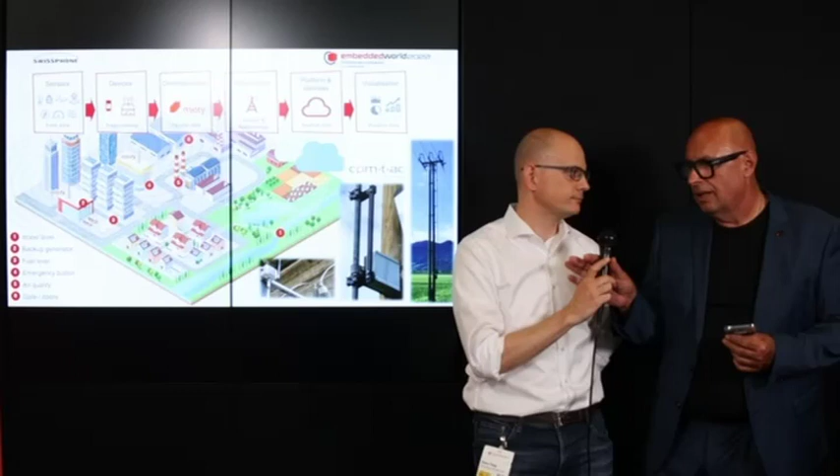Very well. So, what was the intention of Swissphone joining the mioty alliance and also incorporating the mioty standard into your products?

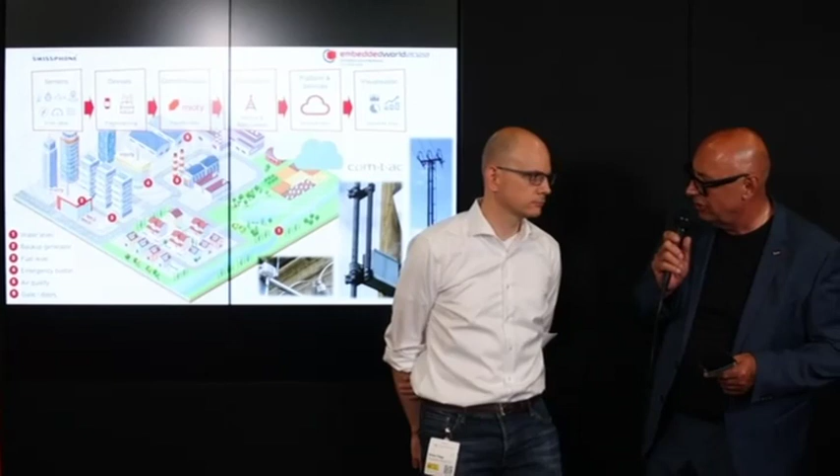Yes, so as we are engineering guys, we have been thinking about LPWAN systems and how they can be integrated into our existing radio products. And as it turns out, mioty is one of the best technologies that fits currently together with our existing radio technology within our pagers, but also for other use cases. As you already know, it's about the key USPs of mioty that brought us to this decision - it's about reliability, robustness, mobility, and also the scalability.

Well, the hard key of your business is of course reliability, because you provide networks also to police and firefighters and so on. But that's not it - as you already said, process industry and so on. HSE is a big issue there, and reliability is actually a must. So how do you position yourself in the IoT process chain?

Okay, yeah, that's right. So we see ourselves bringing mioty into our own segments, and by doing this, we try to be a full chain provider - from the very beginning at the endpoint up to the system that the user actually needs and uses, like control centers and so on. In between, we try to bring our own existing products within this chain. On the other hand, we want to help the other alliance members and their segments with our products, so that the family can grow together.

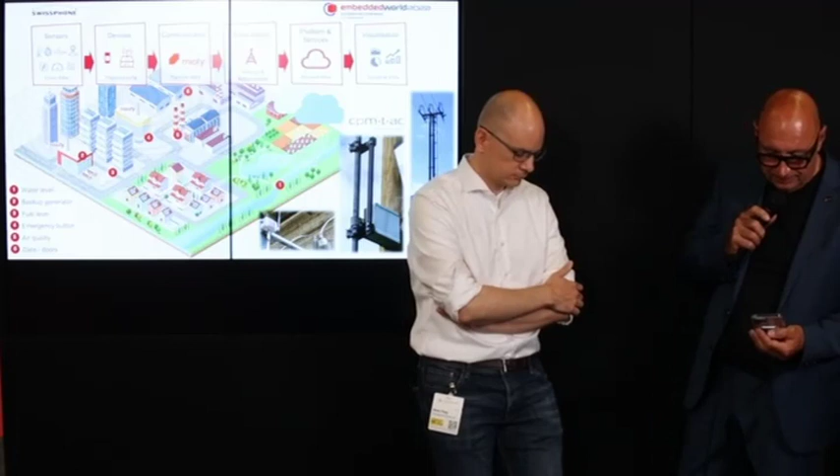Thank you very much, that's very interesting. But what kind of products are these in particular you have to offer?

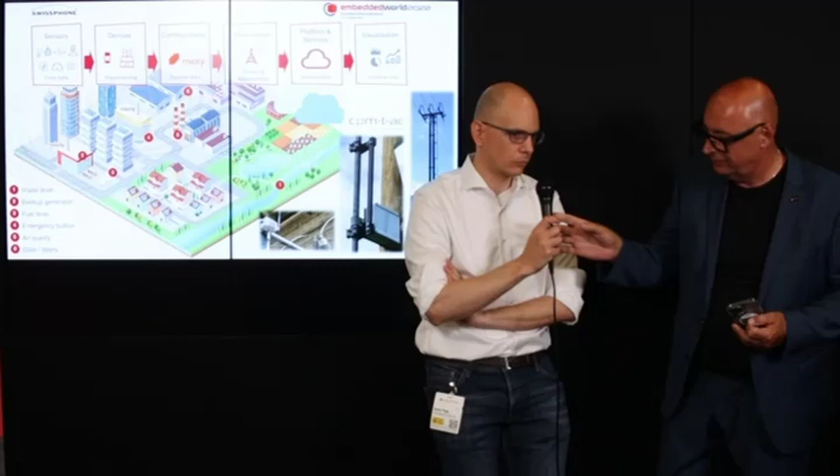So we are currently working on three different products. One of it is a mioty base station that we will launch at the end of the year, and then we have a mioty module that we already brought into some prototype projects with partners of the alliance. And last, we of course want to integrate the technology in our existing paging solutions, so we will see pager terminals not only have LTE but also mioty integrated inside.

The main use case for this is lone worker protection. So in industrial environments, this is a big issue - to keep track on your personnel, know where they are, and give them something into the hand if something happens. This is what our products already do, and now we want to combine this with mioty.

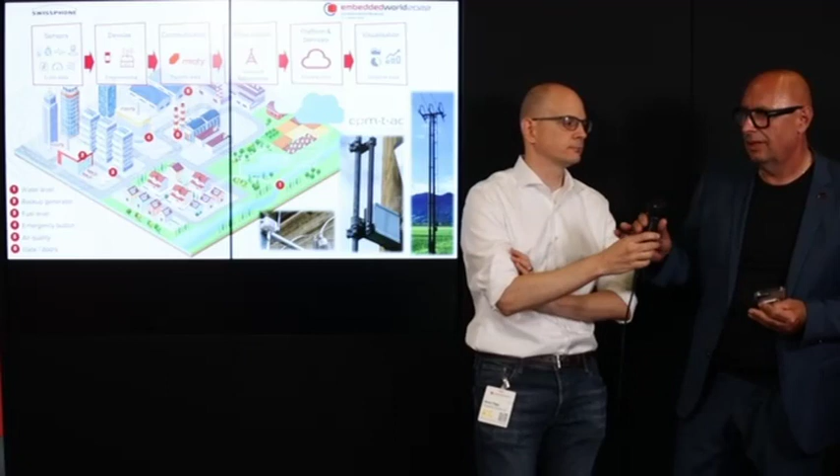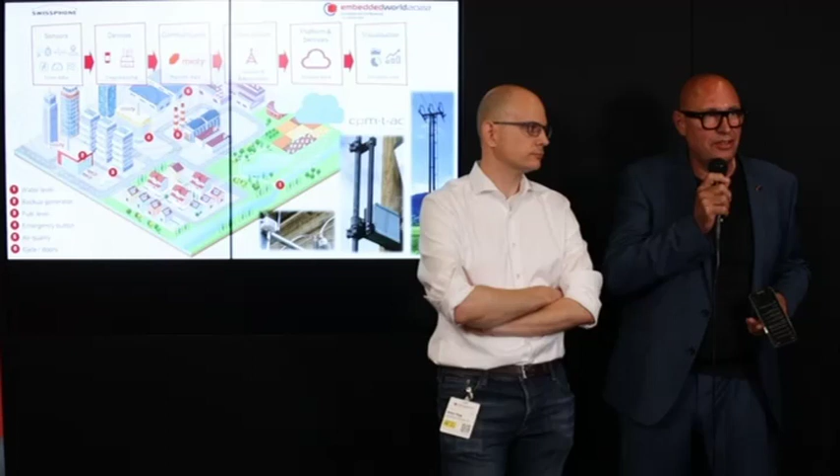Well, we hear a lot of rumors from the communities saying mioty is a fiction. Of course, mioty is not a fiction, it's reality with real products, a real ecosystem, and the real reliability which mioty has to offer with the standards. You didn't come with empty hands like all your pre-interviewers, also from Switzerland. So what have you brought with you?

Okay, so I don't showcase them all during the interview, but you're welcome to talk with me together with the product and have a closer look. So we have them here on the table.

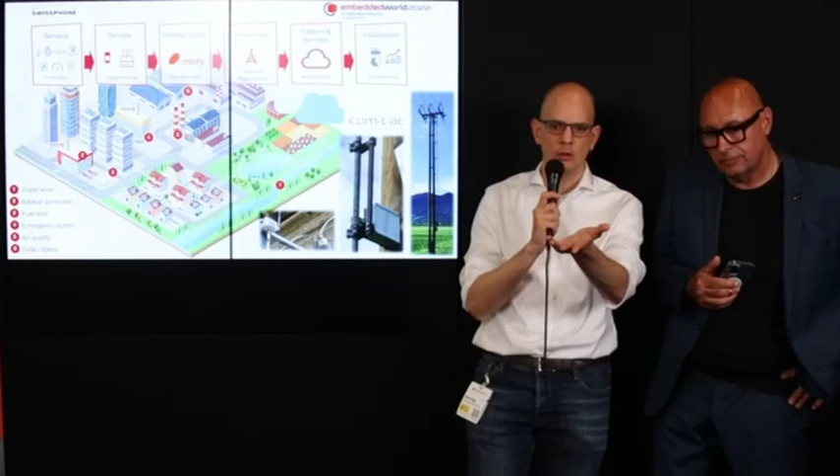What you see here is the mioty base station. It's very compact and rugged. This is the prototype that we have already featured within our evaluation kits, so many companies within the alliance have laid their hands on it and tried it out. It runs the evaluations from Fraunhofer, but the final product will soon have our own software, and will be fully certified.

The strength of the base station is redundancy, besides the compact form. So we have power redundancy - we have DC power inlets, two of them, but also Power over Ethernet, so you can bring your energy together with the connectivity. In addition, we feature LTE as backend connectivity over wireless systems.

Just one word - you said this is one of the first models, looks like a rugged, very well thought product to me, which you can really release in the wildlife, industrial settings. We have one customer together, and they have mounted this outdoor. That product has very good IP protection - if you look at it, very well done.

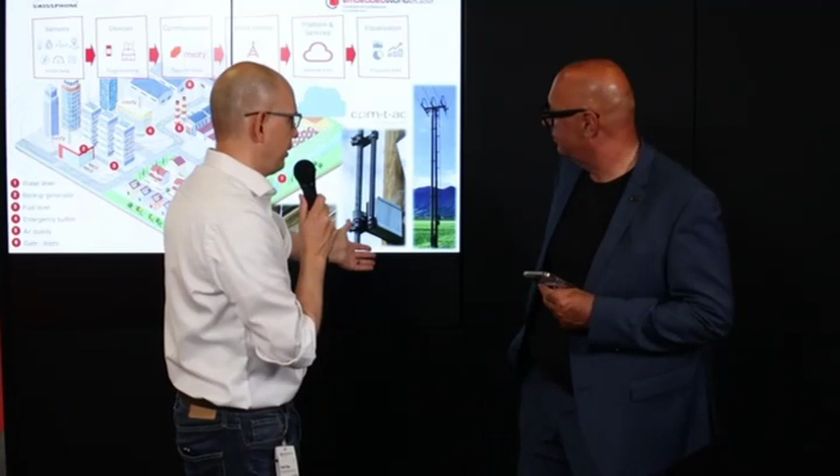So the use case they had was actually pretty funny, because it was an internal competition, like an innovation competition. So employees could bring their ideas, and this one actually won - the one I just explained. So it's about the power grids.

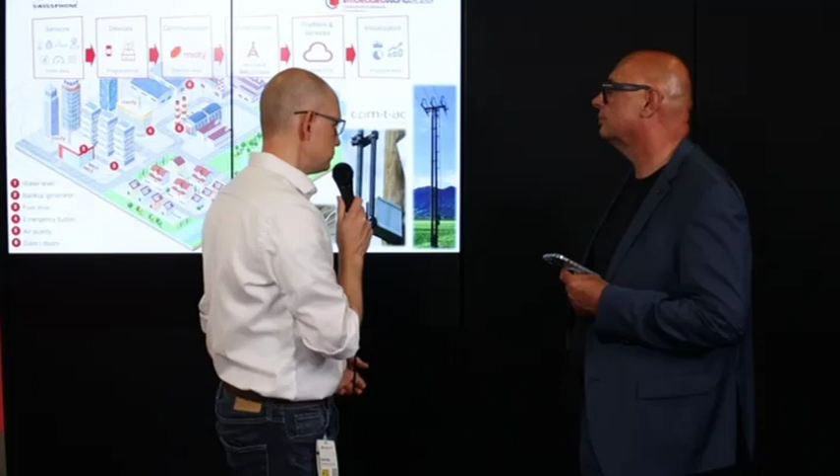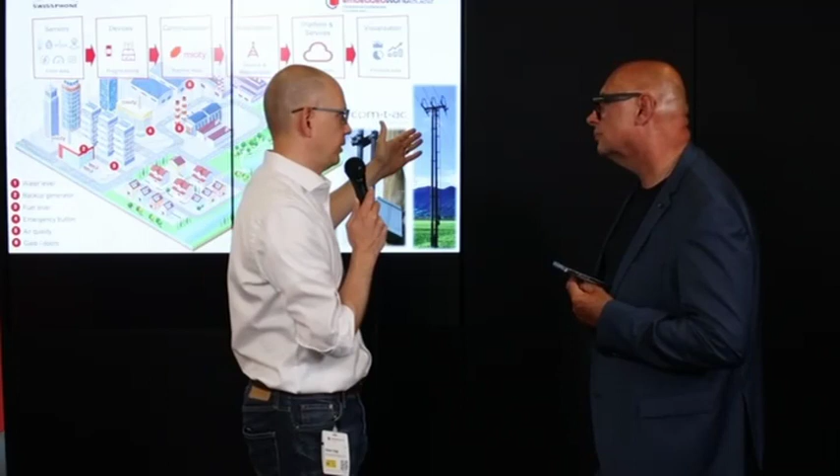Think about mid-voltage power poles you have in rural environments usually - they are very segmented, so you have a lot of interconnections and junctions, and you need switches to switch them off if you have to repair such a network. What they want to have is supervision of this switch state, and this is where Comtac came into play.

Yeah, power is quite a critical and big issue, especially at this time, and quite impressive that you have won this case - it's not easy. There are a lot of sharp, very skilled people applying for such a POC. So congratulations for that, quite impressive.

And what else? What's the next plan for, let's say, the next year for you and the projects and the implementation of this wonderful POC?

Okay, so yes, we can talk a little bit more about this POC, and the good news is that now we know that we will go to the next phase. This is really a project that will bring all of us further, even others within the alliance, because the next question would be the backend and how they could be integrated into their SCADA systems. Maybe a little bit more about this POC.

So we had one base station set up in a rural area, and about 10 sensors - 8 of them were mounted on poles. We had other sensors brought in by Comtac, and we actually helped them to mioty-ize their products. Comtac had LoRa sensors and narrowband IoT, and we helped them integrate our module and optimize power consumption, etc., to get the setup working.

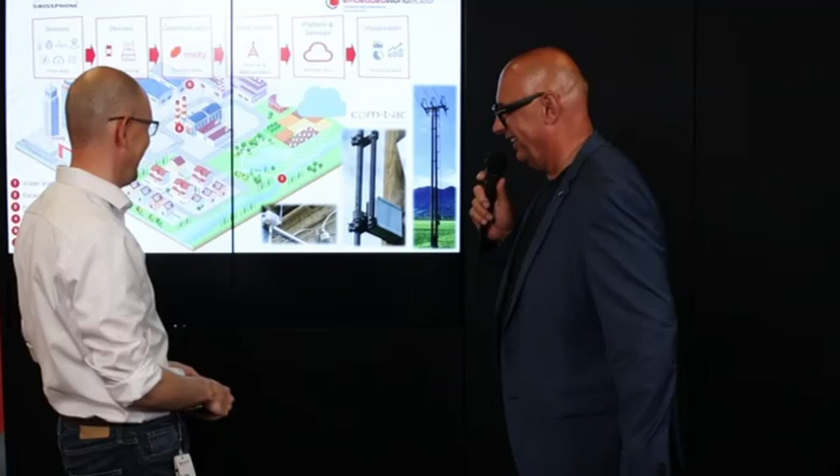Yeah, it's a little bit tricky. Sometimes it doesn't love operators. Okay, one more, we will get this done.

Here we go. Oh, that looks interesting. Tell us more about it.

So let's get back to the POC I mentioned before. I think it's worth sharing some results from there.

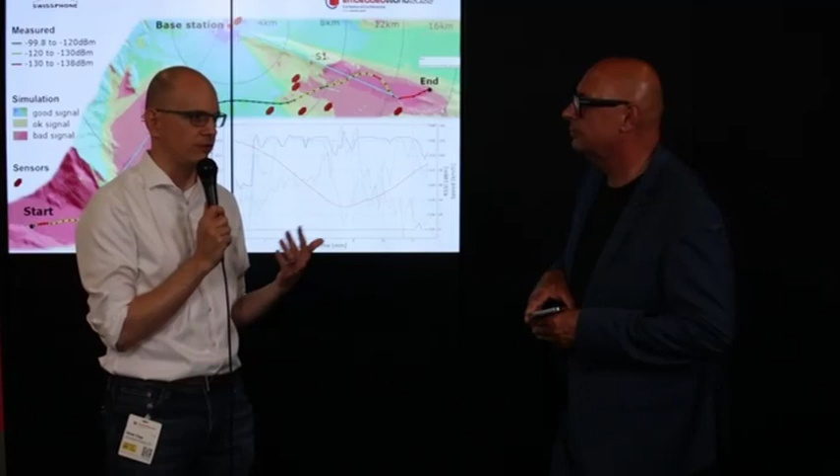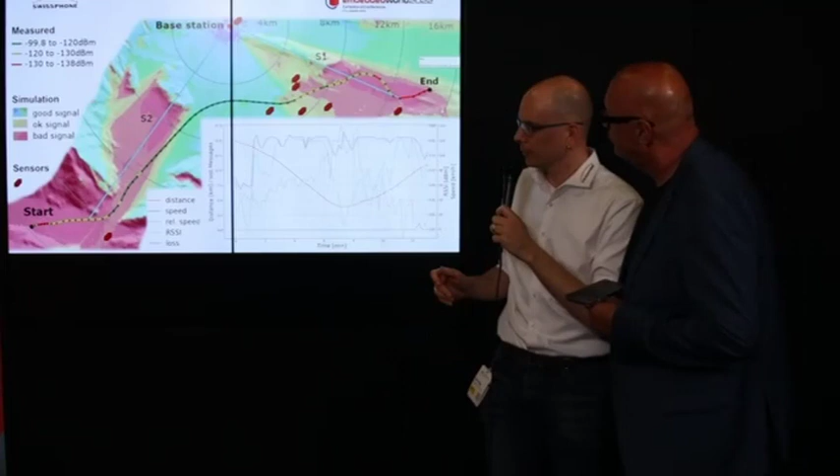Beside the use case I explained with the power grid pole, these sensors are stationary, and this is a map of the area that we had showcased the POC in Switzerland. Here you see the red dots - these are the stationary sensors, and the base station just in the middle. The ranges between the base station and the sensors were up to 20 kilometers in a rural area.

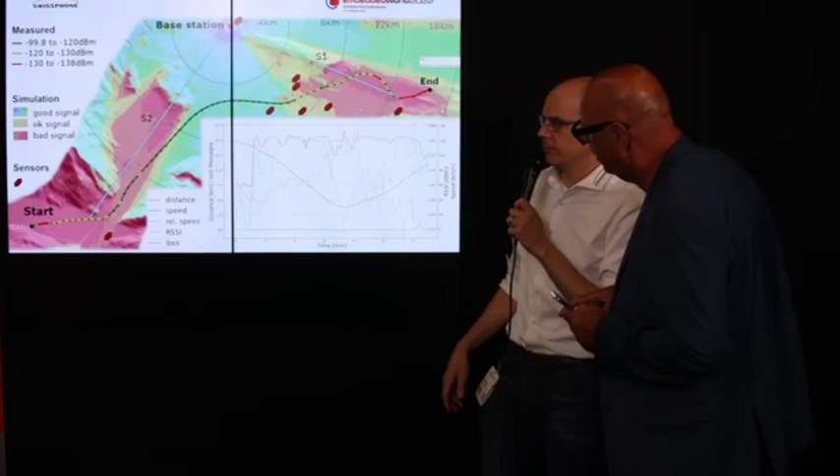We had this POC running over 6 months, and during that time we collected 1.5 million data points and 3 to 30,000 mioty messages per sensor. Most of the sensors were placed at a spot with a link budget just above about 120 dBm, and within that scenario we had not a single lost message during the whole period.

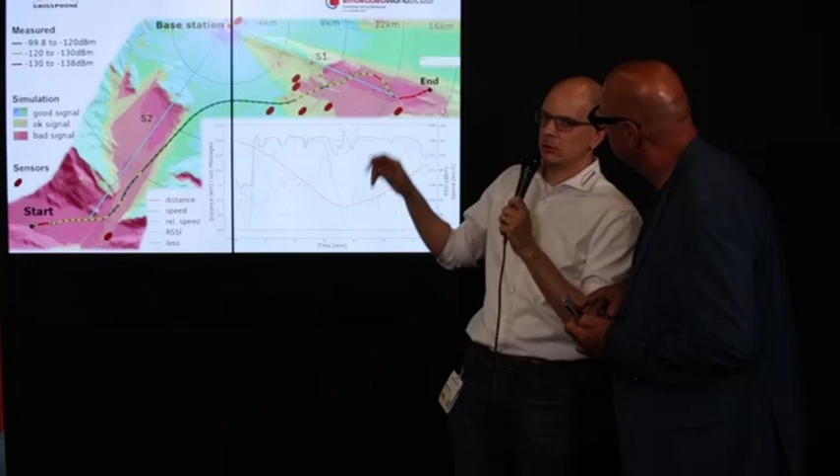We had one spot in the red area where we had about 10% packet loss. What you see in this picture is that Swissphone has pagers, so we rely on mobility and portability - a pager must work also in such an environment, not just static.

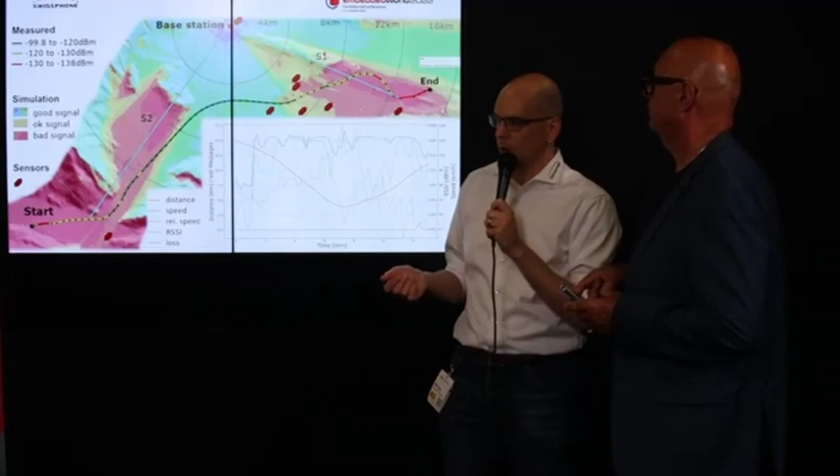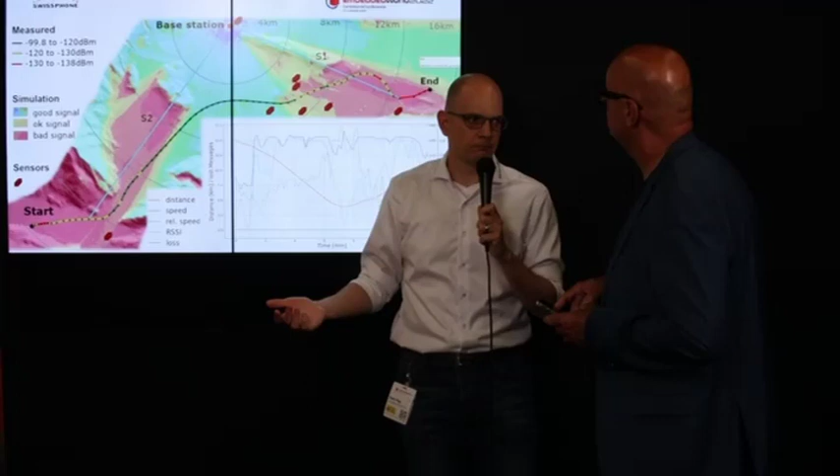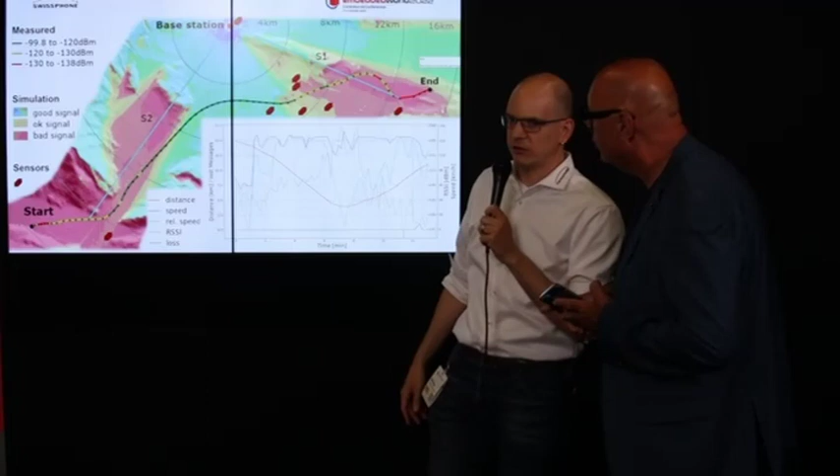So we did a test drive to try out if the promise of mioty working up to 120K really holds. What you see here is a test drive on a highway in Switzerland, shown as the colored line along the stream, and the test run was at high speed - highway speed up to 120K.

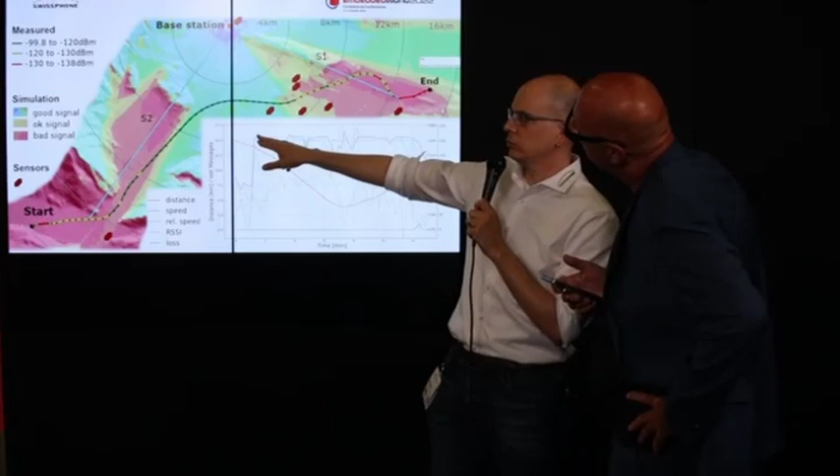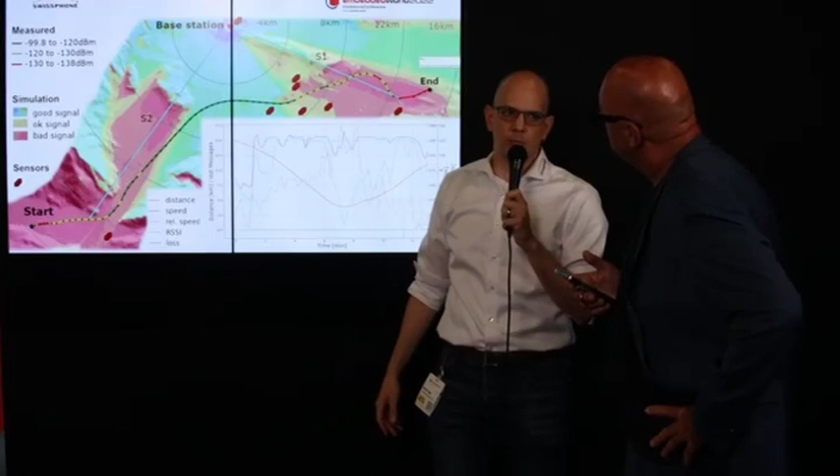You see it here on the plot. The blue plot shows the actual speed on the road, and the light blue shows the relative speed from the vehicle towards the base station, which is relevant for Doppler propagation. The red line shows the distance between the base stations - we had up to 15 kilometers of distance.

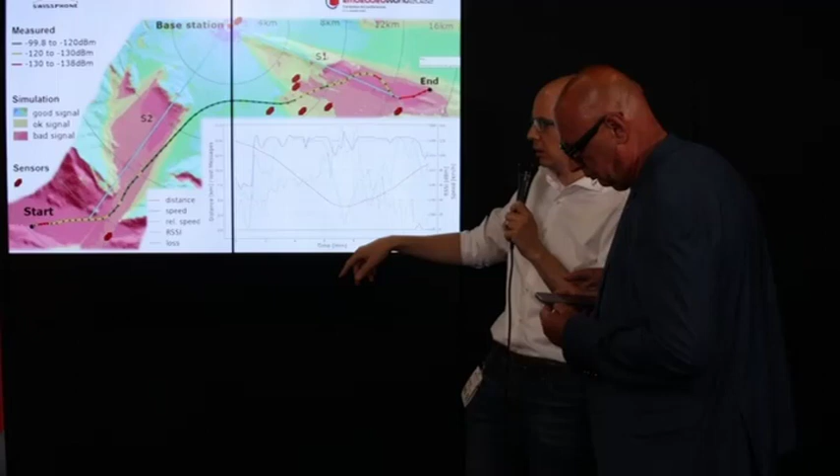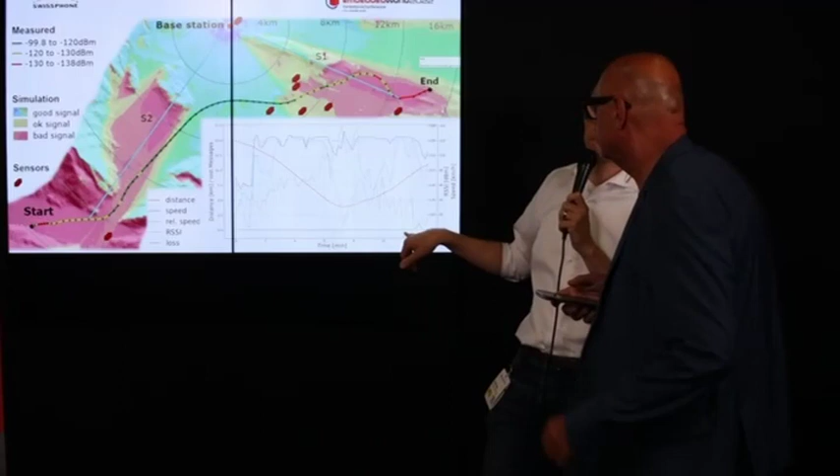You see the RSSI plotting here, which came pretty close to the system limit, down to 138 dBm at two spots. But overall, within the 12 minutes that we ran the drive, we had only lost one message. So for us, this is a pretty impressive result.

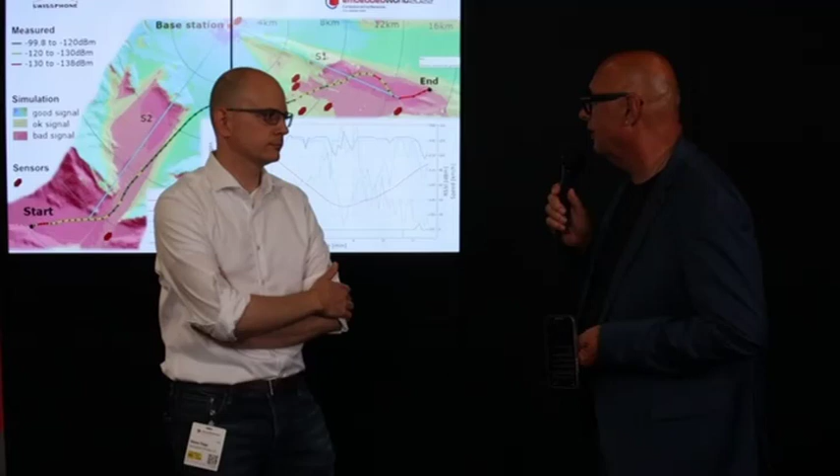I cannot agree more. So you took everything to the test - rural areas, obstacles, collecting data on a driving or moving vehicle at speed - and losing one telegram is almost nothing.

And this is exactly what we need. We need these tests, we need these stresses, we need the challenges of the setup. You have the products, you provide the solutions, so they are real.

As we can see here, you have not only built an ecosystem, you also put the ecosystem to the test with real measurements and reliable data, and that's awesome. Thank you very much.